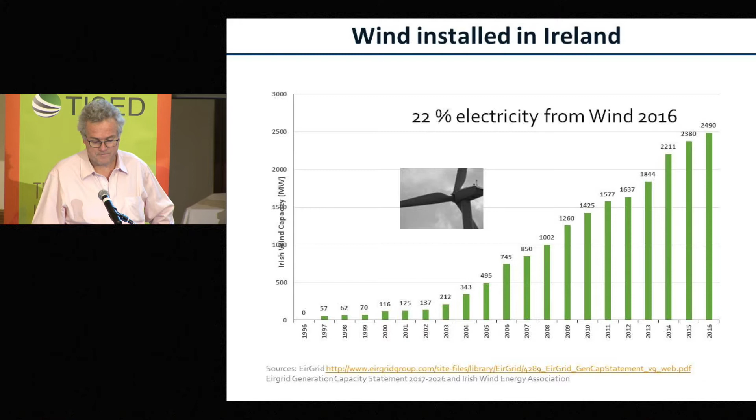In fact, we've so much wind on our system now. We previously, for economic reasons, were a net importer from the UK. We're now a net exporter to the UK because of the amount of wind we have. So generally speaking, we're exporting.

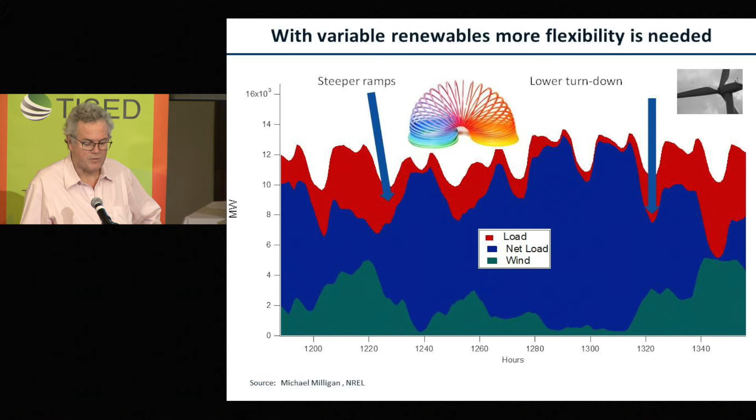The thing about gas is, gas grids have storage. I've shown a picture here - you can store gas very easily. The pipes themselves have gas in them, I think this is from Alaska, I'm not sure, but I'm sure it's somewhere there. Gas itself, by its very nature, you can store it. Even the pipelines have natural storage in them. So gas is a very good fuel to match variable renewables.

I'll come on to talk about Quebec, because in Quebec you have hydro, which is not that variable. But the point of this slide is to show you that electricity and gas are linked. We couldn't integrate all the wind we have on the electricity system unless we had a good gas network, and we have plenty of gas to meet it.

The other point of this slide is in the bottom right-hand side. That's a jet engine. Does anyone want to tell me if it's a Rolls-Royce or other? Does anyone know the difference? That's only half the information.

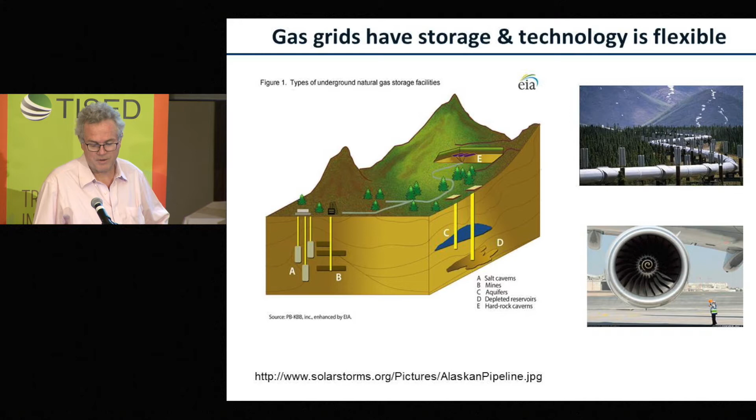That brings me on to the launch pad for the rest of what I'm going to say - the whole area of energy systems integration, which I mentioned last time I was here, but now I'll deal with it in more detail. I showed this diagram before.

This diagram was generated by the National Renewable Energy Lab in the US. It shows you all the energy vectors: electricity, thermal - that's heat and cold, fuels, and it also shows you water, data, and transport, and the different dimensions.

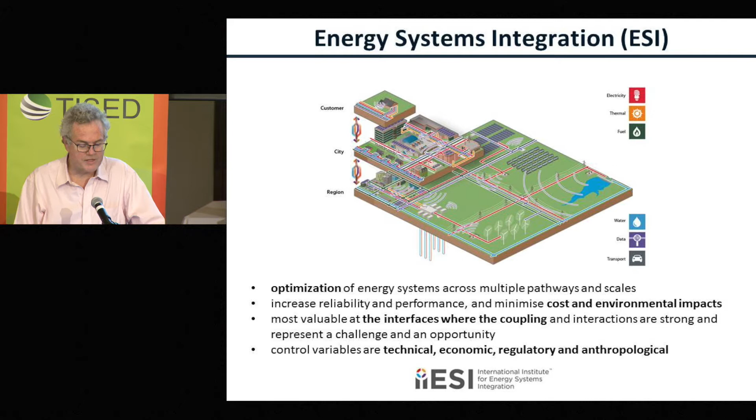The idea of energy system integration, the whole concept, comes about because if you try to integrate lots of renewables on systems, you can't just integrate them within the electricity system or within your country or region - you have to start expanding out. This brings up Eisenhower, who apparently wasn't a particularly good president, but he said that if a problem gets difficult, if you expand it, the solution emerges. That's the concept we're working with here.

If you try to integrate enormous amounts of variable renewables, wind and solar, onto systems, you find you have to make the system bigger to absorb it, or use the gas system to absorb it, or dump the excess electricity into heat or transport. That's the whole concept, and it's come about because of that.

So what this diagram is trying to show is that across the dimensions between the customer and the region, the connections are becoming tighter, and between electricity, heat, and fuels it's becoming tighter as well. Also water, data, and transport - transport is a network but it uses energy, data is a very important enabler of the whole thing, and water is a special case. We're not going to talk about it today, but water is very, very important.

In fact, the world will face a water crisis before it faces an energy crisis. But water is very important because it's a huge enabler of energy, and it's also a huge consumer of energy.

The bullet points there: optimization of the energy system across multiple pathways and scales, increase reliability and performance, minimize costs, reduce emissions. You have to do it for some reason. But the place we're really interested in from a scientific point of view is the interfaces where the coupling is strong and there's opportunities or challenges. If there's a coupling between the energy vectors, or across space where there's a problem, then you have to address it, or if there's a coupling where there's an advantage, you should use it. So therefore it is quite focused.

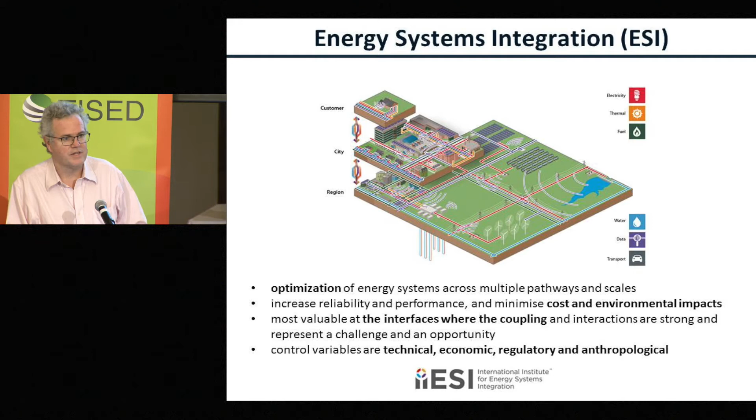So we did some work, and I'm not going to go into detail, I'll show slides with references at the bottom. This is trying to quantify the impact that increasing wind generation has on the ramping of gas plants and also on the number of shutdowns and startups, trying to calculate the cycling impact. And it does have an impact.

There are costs associated with this, and there's lots of people who have worked in this area. I'll leave it to you to follow up on the references. But my point is that when two things interact, it's not always good. Sometimes they're bad things and you must quantify them. So that should illustrate that.

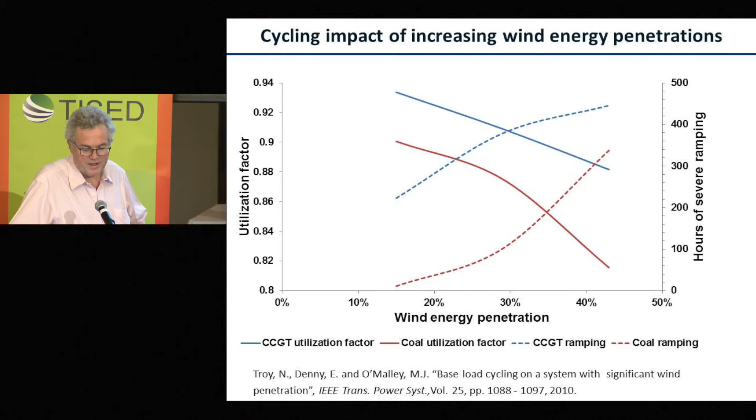So I did meet an anthropologist recently. She's from McGill University, her name is Gretchen Bakke, and this is her book, The Grid. So I think I'll start off there. We're not only talking about engineering, economics, regulatory, we're also talking about human beings and what they do. This is where I get into real trouble because of terminology, so as an engineer, let me use my terminology, I could be wrong.

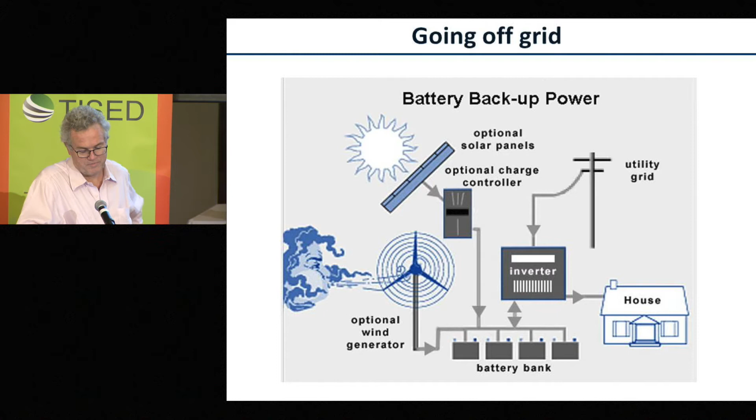But anyway, going off the grid is a big issue now, there's a lot of talk about it around the world. This is something I took from the internet, it shows it simply: people can go off-grid because they can buy PV. Now why someone would put a wind turbine in their home, I have no idea, because the economics make absolutely no sense. PV makes some sense in certain places, but wind at small scale makes no sense because it's a cube law, essentially a square law. So really big scale makes a lot of sense. PV is a bit more sensible because it's about surface area. So anyway, this is what they put in, and they say they'll go off the grid.

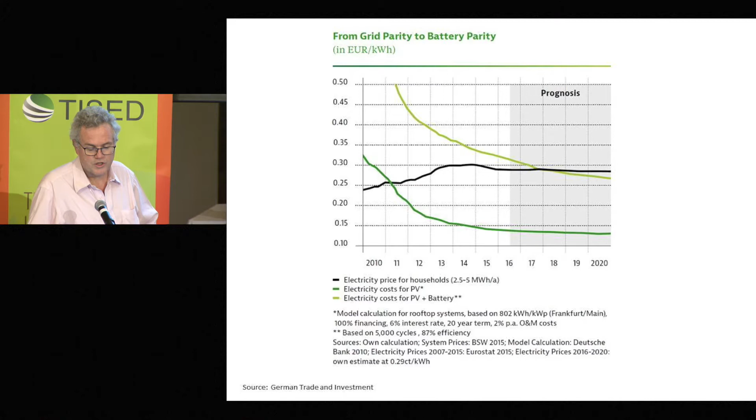So this diagram comes from Germany, from a good source, German Trade and Investment, and it shows three graphs. One shows the cost, the price of electricity for the consumer. Note it's 30 euro cents, which is around 40 Canadian cents approximately, and you're currently paying about 6 or 7 cents here. So it's 6 or 7 times what you pay here.

So that's the first point: electricity in Germany is much more expensive. The two other lines show electricity costs for PV. But look at this one here, this is the combined electricity cost for PV and battery. The point of this graph is it says, hey look, in 2017, right now, there'll come a point where buying PV and a battery is cheaper than buying it off the grid. That's what the graph says.

Correct? No, not correct. This is a classic case of, I can't resist it, this is a classic case of... what do they call them?

No, I'm talking about the gentleman in the south. What does he call it? Yeah, it's a classic case of that. You said it, not me. You've got to dig into this.

First of all, the price of electricity does not just include the energy price, because in Germany that price includes the cost of subsidies for everyone who bought PV and batteries. So in fact, in that price are taxes, levies, the subsidy price of PV — not only what you're putting on your roof, but what was put on someone else's roof 10 years ago. It's all bundled in there. So that price of electricity is not actually comparable — it's not possible to compare them.

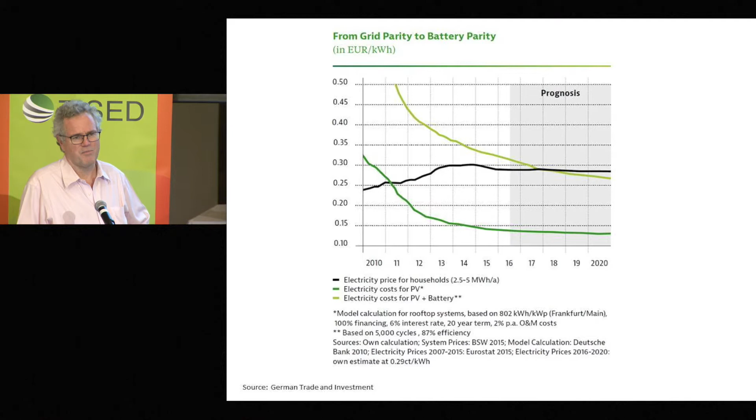Now, if it makes no sense in Germany after what I just explained, how much sense would it make here when the fundamental price is still a sixth? The answer is virtually none. I think Germany and you guys are about the same — you're further north in Germany, are you? You're both poorish enough in some places, I'd suspect.

But this brings up the spiral of debt that people are speaking about. What's going on is that, if you look at any system in the world, the reason people are putting PV and batteries on their houses, largely speaking, is almost always because of perverse incentives — the tariffs, etc. It's very rare that it actually makes sense. It makes sense to the individual, but it may not make sense overall.

So what's going on: people put solar on the roof, the utility sells less power, but still has a lot of fixed costs, because the fixed costs of utilities are generally bundled into the volume charge. So when you use volume, part of that charge is paying for the network. That means the utility has to hike its prices because of its fixed costs. That makes solar more attractive, which means more people do it, and the whole thing spirals to death.

This idea that somehow the utilities are going to die is absolute nonsense, because this is just a complete and utter perversion and has to stop at some stage when sense prevails. To say you can get rid of the utilities is just nonsense, because it's incredibly expensive to go off the grid.

This is Australia, and remember, Australia has sun, so that's a first up advantage for Australia. But mind you, Australia has enormous electricity prices — last week we were discussing it, they're around five times what they are here. So they're not as bad as Germany, but they're five times. The reason seems to be that they've put an enormous amount of investment into their network recently, and also the distances in Australia are absolutely enormous, so the network charges are very high. Anyway, they pay quite a lot.

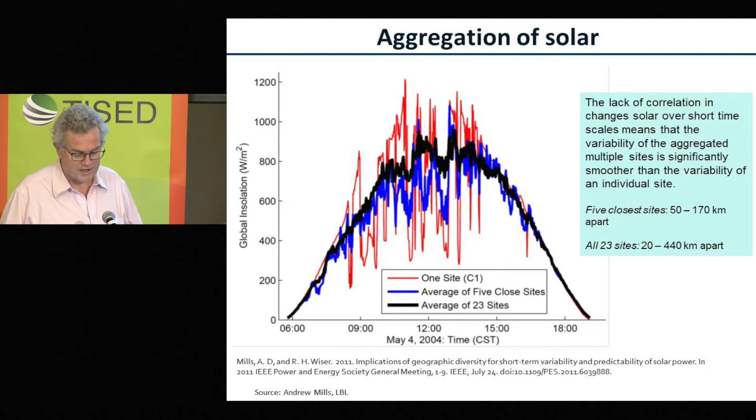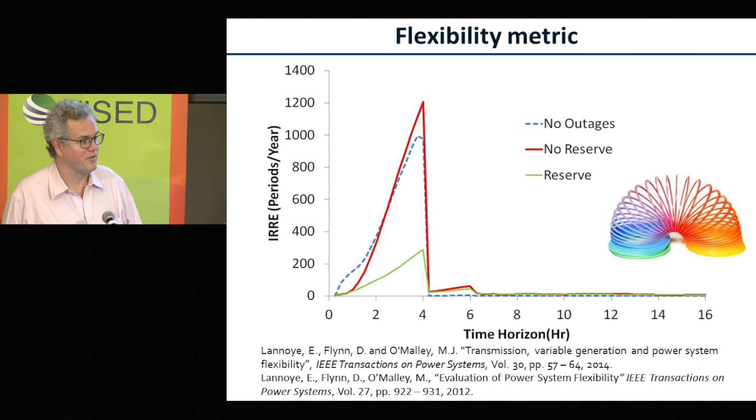I didn't say it. Anyway, to be honest with you, I think the trilemma is not... actually, I went to look for it—there is a word called quadrilemma, believe it or not, I didn't think there was. So I don't believe there's a trilemma or a quadrilemma, because the consumer, what people want to do—people will go off the grid, don't get me wrong. I'm not saying everyone rationally looks at it like I do, but they're going to do it, lots of them are going to do it, and therefore you have to take account for them. In fact, in many ways, what we have to do is design the energy system so their desires are met, or halfway between the economic and engineering sense of some description.

So going off grid, though, if you just take it as a concept, the minute you go off grid one of the things that highlights itself immediately—and this is the only time I mention CHP—is that combined heat and power suddenly makes a lot of sense, because you need heating as well as electricity, and PV doesn't shine at night, etc. So you suddenly say, well, maybe I'll have combined heat and power in my factory or my campus or my house or whatever, and combined heat and power is very efficient. So there's a lot of attention to CHP in microgrids.

And this is a slide I got from a gentleman who was here last week, Andrew Melchers. However, this slide comes from a project in Ontario, not in Quebec, because I see this making no sense at all in Quebec for the reasons I just said.

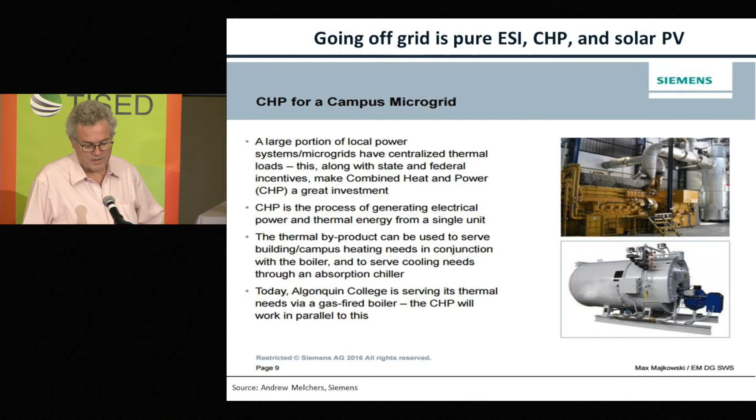So I got this report from Francois, the 2030 Energy Quebec report. In some ways I should have read it cover to cover, but I didn't. I deliberately didn't, not because I was out having fun in your city, but because I didn't want to be perverted by it in any way. So I did dip in and out of it to steal some graphs though.

If you look at it, there's a very interesting section on integration being not only physical but institutional. I think the report's quite good from the little I looked at. Ensure integrated governance - so it's not just about physical integration, you have to have the federal government, provincial government, and I'm sure you have a municipal government too. All these arms of the state and institutions need to work together. That's key - it's not just about integrating things physically, but institutionally.

If you want an example of how it can go badly wrong, here's an article written by William D'haeseleer and colleagues in an issue of the IEEE Power and Energy magazine that I was the editor on. He drew this diagram showing what's happened in Europe: wind and PV are pushing coal and combined cycle gas turbines off the system. What you'd like is for CCGT to push coal out, since coal is much more carbon intensive. But the policymakers screwed up - they made a complete mess of it. Gas plants are closing and coal plants are being built, all because the policies weren't thought through at an integrated European level. So this idea of integration isn't just about physics, it's also about policy.

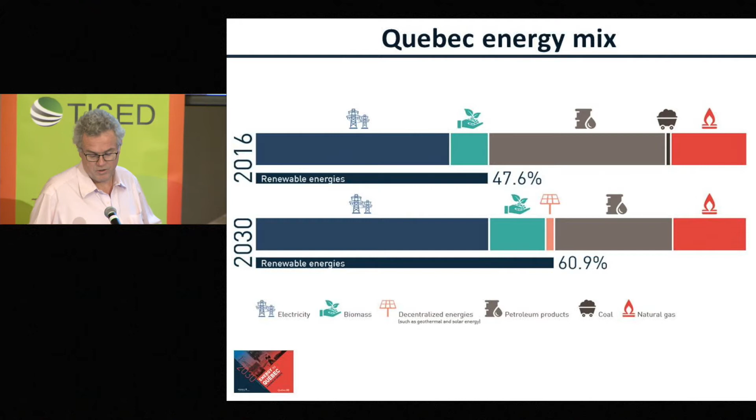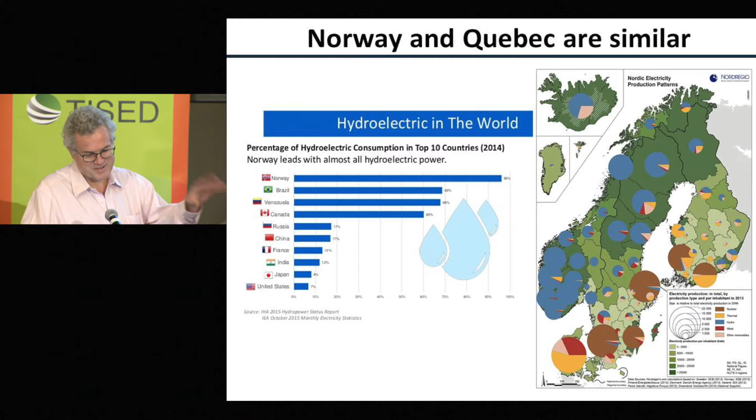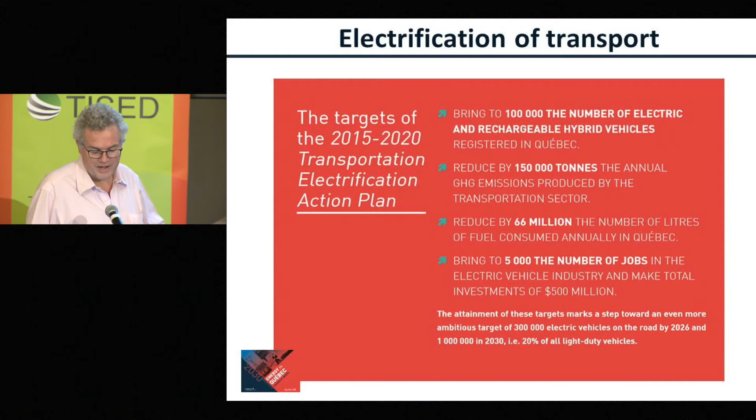I should have talked to you beforehand for the bribe.

If I had known beforehand... anyway, I suppose my bribe is only half what it is, after the fact.

I mainly work on electricity, heat and fuels. Transport isn't an area I spend a lot of time on, but I'd suspect high-speed rail would make sense up and down that corridor.

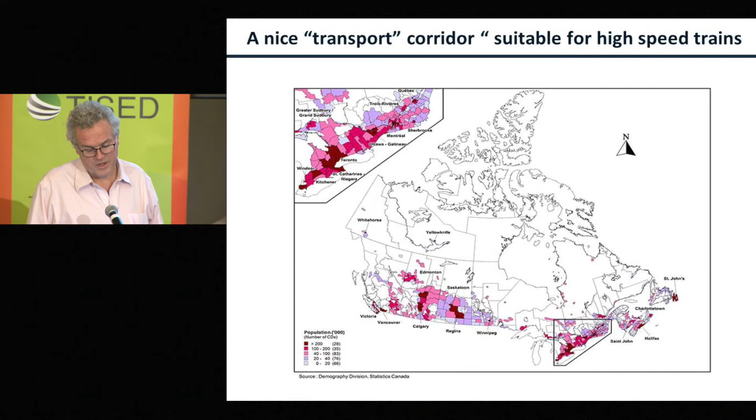So let's talk about heat and integrating the consumer. I'm doing this because your heat is already electricity, but some people are looking at electrifying their heat to decarbonize it, so you've already done it. I'm showing you what other people are doing, since there's probably some similarities. So, some work that we've done.

If you take electricity, heat, and the consumer all together, and add weather into it as well, you have to do integrated planning. Because we plan electricity systems typically in isolation, and we plan all these other systems in isolation too. But if they're all starting to link together, you have to plan them together. If you're going to electrify heat, you have to plan the two systems together.

Weather is important because if you have an enormous amount of variable renewables in the system, the heating requirement and the wind are probably correlated, and the sun too. So weather links them together: on the supply side you have wind or solar providing renewable energy, but on the demand side you have the heat or cooling requirement driven by the weather as well. So weather is important to look at, and the consumer, as I've mentioned several times.

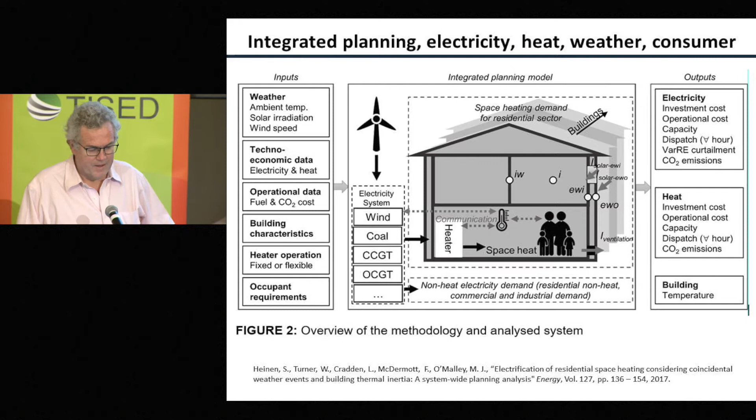So, integrated electricity planning - this is a very nice graph. I should have put the name of the person I got this slide from in the bottom left corner, but I didn't this time. This came from one of my PhD students, but he found it somewhere.

Consumer satisfaction is at the heart of this. People have talked about demand-side flexibility - the idea that we can vary people's demand. The key to it, though, is consumer satisfaction. You cannot go and mess with their load if they then become dissatisfied - that doesn't make any sense. This diagram shows it very nicely.

At the moment in Ireland, most of our heating comes from gas, not electric heating. There is some, but not a lot - about 200,000 to 300,000 people out of 4.5 million have it, so it's quite small. But if you want to decarbonize heat, one of the things you've got to do is electrify it.

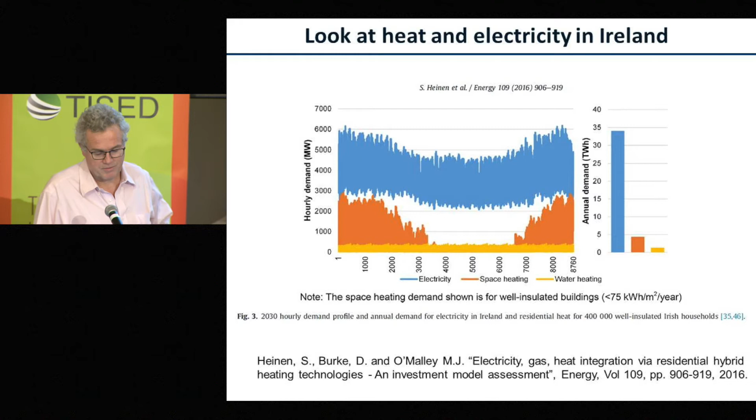On this graph here, it shows you on a seasonal basis that you have a problem. But if you go into it on a daily basis and say, I'll heat during the night rather than during the day, you can shift the peak. It doesn't show it here, but you can shift the peak. And if you shift the peak, you can get a situation whereby you don't have to build as much capacity, and therefore you can make an enormous saving.

Because literally, if you look at this, Goran Strbac has got numbers on this. I think he says that the UK needs to electrify its heat, needs 2.5 or 3 times the amount of transmission and generation as it currently has.

Apparently there's Guinness outside. Some guy came in with the beer. Where is he? Oh, he was thrown out.

I know, 15 Canadian dollars a month, it's nothing, it's zero. So in fact the problem with the demand side, from the point of view of individual consumers, is the amount of money involved is very small. For large consumers who have huge loads and there's only one person involved and the transaction costs are low, these type of techniques do make sense, but for individuals it doesn't make a lot of sense.

And when I hear people saying the business model is wrong, I always paraphrase, so you mean the subsidy isn't there? So I'll leave that one with you.

If you look, there are definitely market barriers to demand side management, and there's different places in different parts of the world where it makes more sense than others.

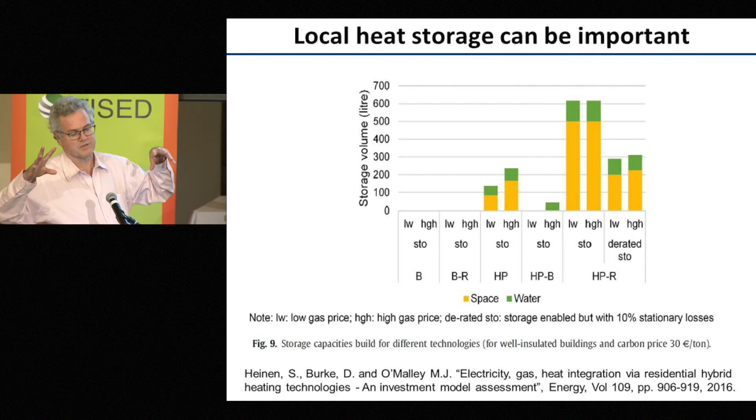So out of that work, storage pops up as a valid thing to do, which is not surprising, because if you remember what Eisenhower said, if you make the problem bigger, these things start to evolve or emerge. Because if you make the problem bigger, you've got far more parameters to work with, and so solutions that are not in a smaller dimension will start to appear. So you have far less constraints.

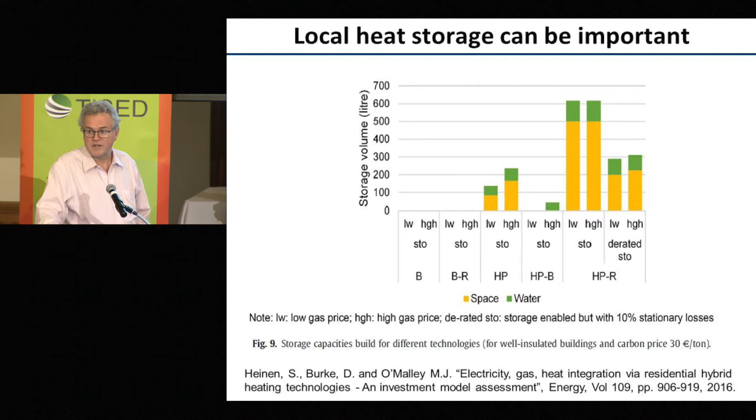So let's look at dedicated storage into grids. I think this is what you were asking about, is this the topic you wanted? Well, I was more looking at the consumers. Yeah, consumers, but I was talking about thermal storage before that. I'm going to talk about dedicated storage now. And what I mean by dedicated storage is electricity in, electricity out. Is that the topic you were talking about?

Chemical, yeah. So this is what I'll deal with now.

So, dedicated storage, integrating dedicated storage. It's different from the previous one, because the previous one is I take electricity in, I store it as heat, but I reuse it as heat. This is dedicated storage, which is electricity in, electricity out. So that's the difference. I have a specific section on that.

So, island applications. If you look at this gentleman here, his name is Nick Miller. Francois knows him well. Nick Miller's a GE engineer, a couple hundred miles south of here in Schenectady.

This is a battery, a lot of batteries in a small place whose name I can never pronounce, but you can read it yourself. I don't know physically whether it's an island, but electrically it's an island, because you've got the Yukon here. This is in the middle of nowhere. There's no electrical power transmission to it whatsoever, and why would there be? It's too far away. The oil or diesel they burn is probably drilled here, sent by pipeline, and shipped back as a refined product. It's incredibly expensive. So it turns out batteries in these islands make sense, because the cost of energy is enormous. And here's Quebec again with that nice hydro setup.

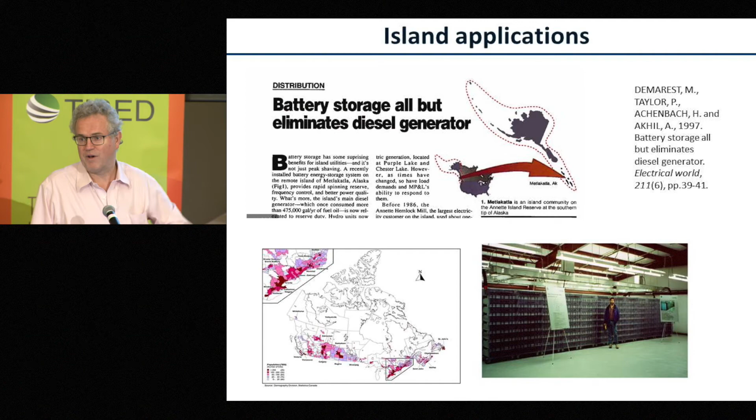I'm the chairman of the European Academy of Sciences, which includes all the national science academies in Europe. I chair a group on a storage report, valuing dedicated storage in electricity grids, which is exactly what this gentleman wants to know. The report is embargoed — I've been filmed, am I? Yeah, it's embargoed, I'll talk to you afterwards.

So that's the background of what I'm about to say. If you look at dedicated storage — electricity in, electricity out — in the world today, this doesn't apply to Quebec at all, really. You have one year's worth of storage behind those dams, so it's a completely different thing. But looking at electricity storage in the world today, 95% of it is pumped hydro storage. The other smaller amounts are growing, particularly lithium-ion batteries, and I'll say something about that in a while.

I have not done a formal scientific study on this, and I'm not going to try to publish it in a journal, but I'll give you this. I did a piece of work for the IEA, where they asked me to look at storage. I asked them for all nuclear and all pumped storage built in the OECD countries, because the IEA is essentially the OECD — opposition to OPEC, as I call it. So I just asked them for the data and plotted it out.

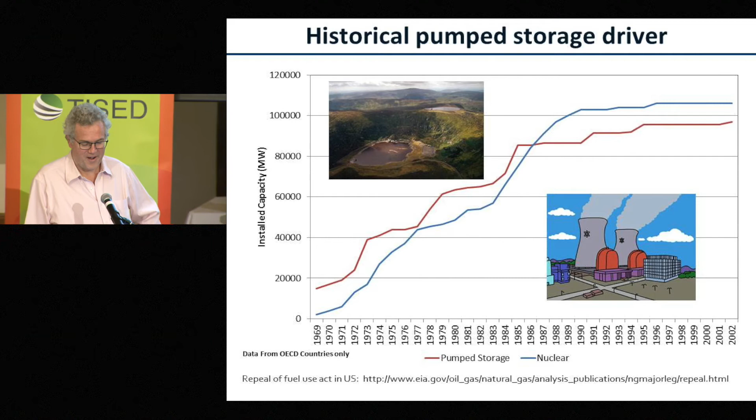Now, I haven't published this. I don't have the time. If someone else has the time, please go do the work, I'll act as a consultant. But I'm pretty sure that is why they were built. So if anyone asks you why there's so much pumped hydro in the world, this is probably the reason. And everyone I know, nobody I know disagrees with me. Then again, nobody I know disagrees with me anyway in anything. So that's a saying from that gentleman down south again.

So if you look at this now, this is from, so the report's embargoed, but I'm the chairman, I can use the slides. You can see that the cost of lithium ion is dropping dramatically, and that's one of the reasons why people are doing that. We're talking about individuals, but I'm talking about the grid now here, it's a different thing. And look where it's going, it's getting down, it might by 2030 make, and this is, we got all the best numbers in the world and we put them together. They're getting towards $100 euro per kilowatt hour, okay?

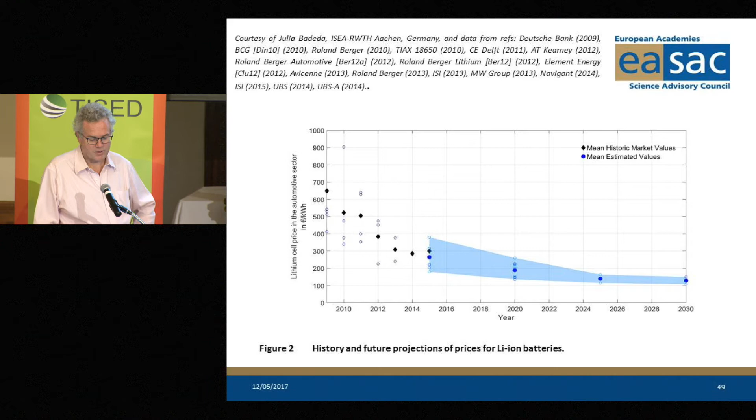Not quite. My challenge is that as long as it does service for the consumer, it may not pay off. But if it services the grid as well, then it pays off more.

Now, in the interest of time, when I sent the slides to Lauren, she said there's too many slides, Mark. I do have other slides that show instances where storage does make sense, particularly in ancillary services markets and regulation in some systems. And this is not that, so you have to take that into account. There are niches where it does make sense, and I did actually have a slide like that. In fact, is it in my spare slides at the back?

If it's not, you left them out. So it does make sense. In the PJM market, for example, at the moment, people can make money for sure, but only on ancillary services, not on arbitrage, correct?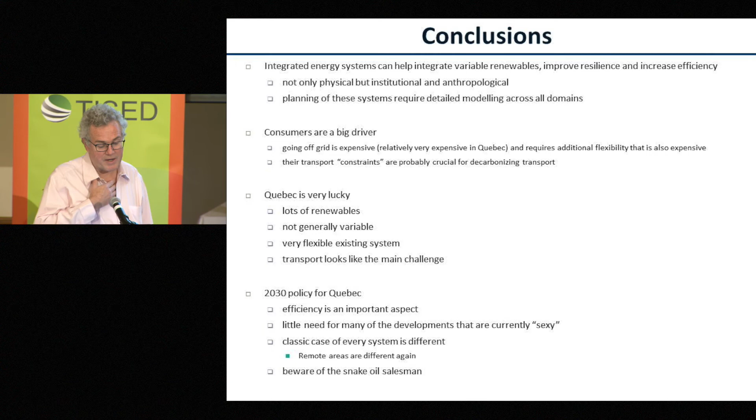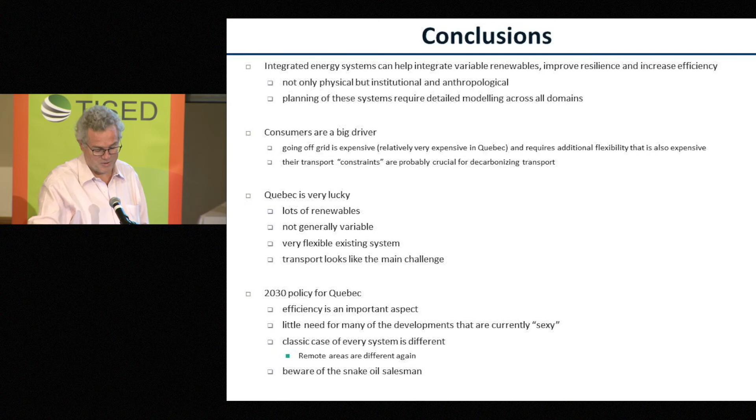I think the transport issue, I'm not an expert, but I'd suspect the biggest constraint on transport... there's probably a backstory this man's going to give me over a glass of wine, aren't you? I suspect consumer constraints, how people use transport, is probably a big issue in terms of electrifying transportation. I don't think it's a technical problem, there's probably some political problem too that I don't know about, but how people use it is very important. Quebec is incredibly lucky.

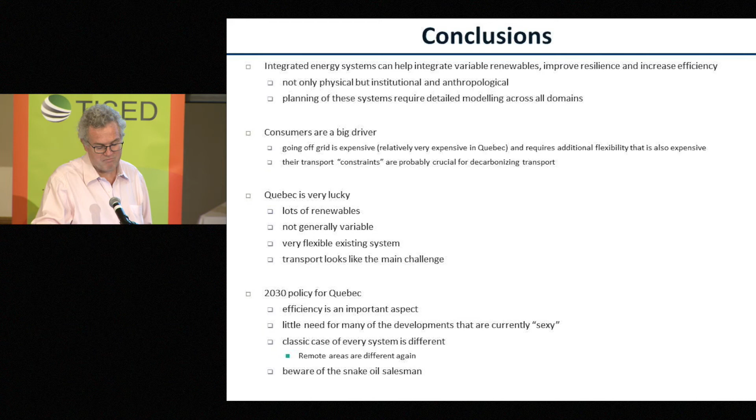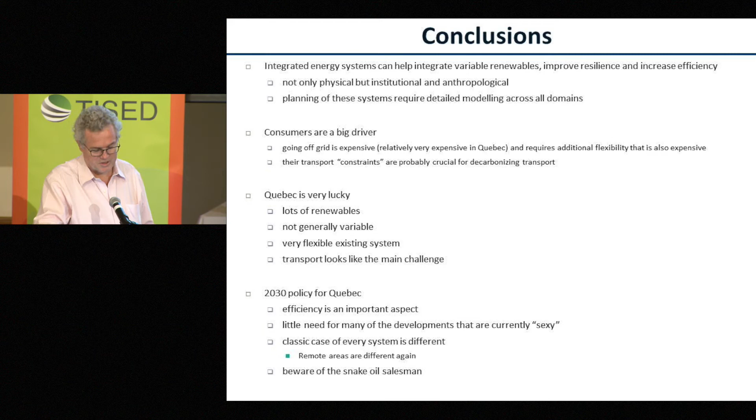Lots of renewables, not generally variable. You have wind as well, for sure. Very flexible. Transport looks like the main challenge in terms of your whole system. For 2030 policies for Quebec, efficiency is something I didn't deal with a lot, but your attitude towards electricity here is, sure, just use it. Maybe the incremental costs I hear of building a new hydro plant is pretty high, so efficiency is something you should concentrate on. I've done a little bit of that. There's little need for many of the developments that are currently sexy. You don't need to be, get on with it. You've got a great situation here, much better than most people.

It's a classic case of every system is different. Like I've said before, every energy system is different, every solution is different. You've got a much different system than we have. You're probably very similar to Norway though. But remote areas are different. So although Quebec has a unique situation, your remote areas are completely different because they're not actually part of Quebec from an energy point of view. Well, sorry, in fact I'm not talking about Quebec, I'm talking about the St. Lawrence Riverway or something like that. That is Quebec from a population point of view.

And then beware of the snake oil salesman, like the gentleman I just saw before. I'm not saying Elon Musk is a snake oil salesman, but you might say that's potentially true. But he's brilliant, you have to give it to him.

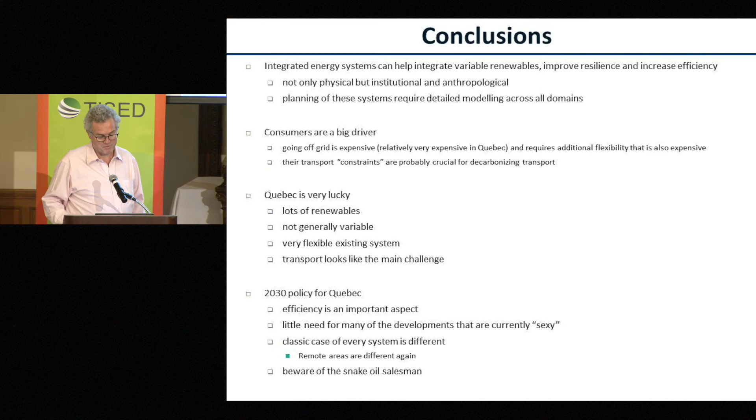And then anyone for lunch? So apparently my Prime Minister is in town tomorrow, or on Thursday, and he's having lunch with your Prime Minister. So after what I just said about snake oil salesmen, I'm going to have lunch with these two gentlemen on Thursday. I don't know whether I should or not. Is your Prime Minister any good? You don't have to answer that question. Our Prime Minister is on his way out. He's managed politically somehow to hold on. He is going, it's official, but he hasn't said the date, so you have to give it to him. He's pretty good at what he does. Well, sorry, he's pretty good as a politician. He's not pretty good at leading the country. That's a different thing.

Let's see if I had those slides. I think, do I have? No, I don't have that other slide I was talking about in the back slides. Okay, any questions? Or have I done all the questions, have I? Yes, sir.

We have an internal study by McKinsey company which shows that in Quebec we will have grid parity for solar maybe in 2025, and we are very scared about that because the projections are that we may have 10% penetration of residential solar in Quebec by the term of that energy plan you have shown. So what is your opinion about that? Is it, because after all, we are not in control, the consumer is in control? And is it likely or not?